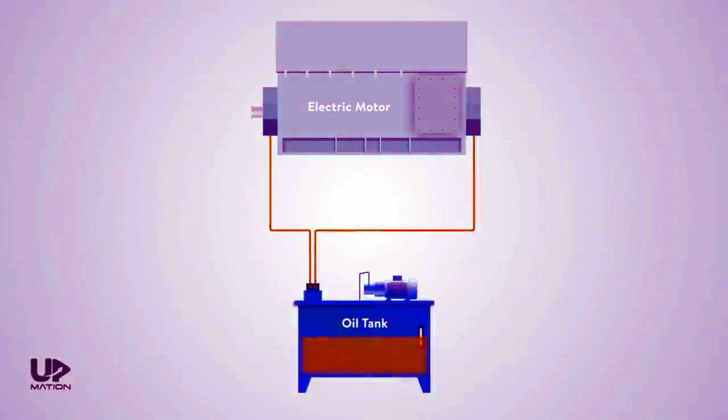If you have ever seen a pneumatic or hydraulic system in industry, you may have encountered these types of equipment with these kinds of symbols on them. These are a kind of control valve.

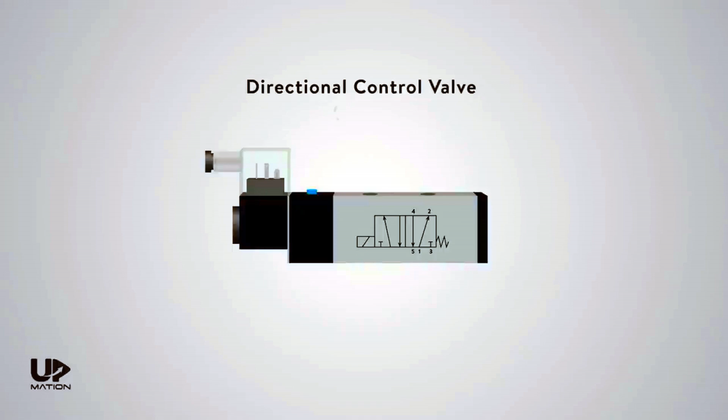The control valves are mostly known by their adjustability and throttling capabilities. But the valves we are going to talk about are the types that control the direction of the fluid flowing inside the pipe.

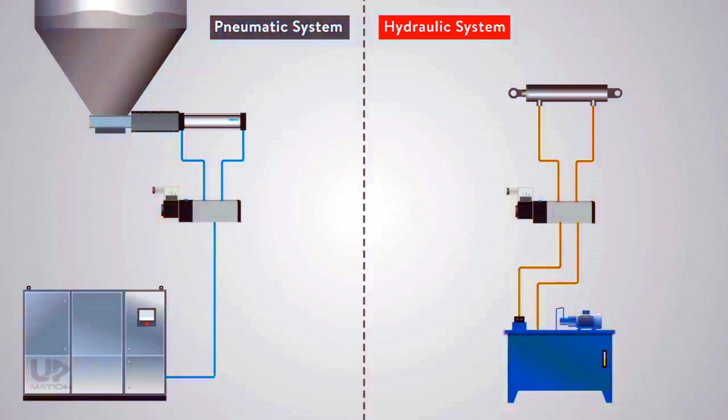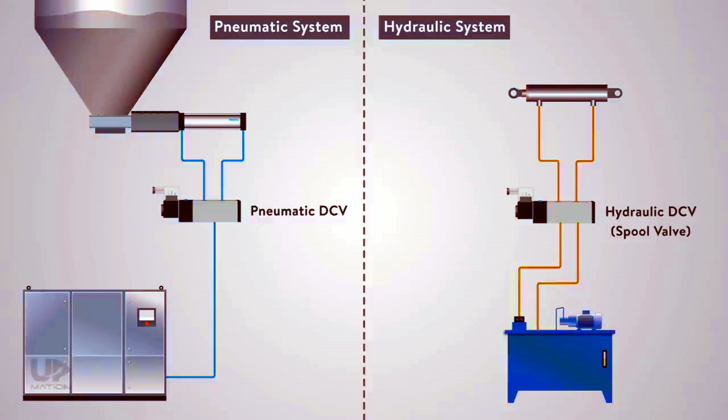Directional control valves are used in pneumatic and hydraulic flow control systems. So there are pneumatic directional control valves and hydraulic directional control valves. Sometimes the hydraulic directional control valves are called spool valves. As we're talking about the basics of DCVs in this video, and there's not much difference in their working principle and symbols, we develop our example based on a pneumatic system. And of course, if you learn one of them, you can easily learn the other.

Let's start with this simple pneumatic circuitry and then see which parts a directional control valve has. The main power of this pneumatic system is coming from the compressed air supplied by a compressor. The directional control valve is directing the flow of the compressed air in two different directions to open and close this slide gate valve using its actuator, which is a double-acting cylinder.

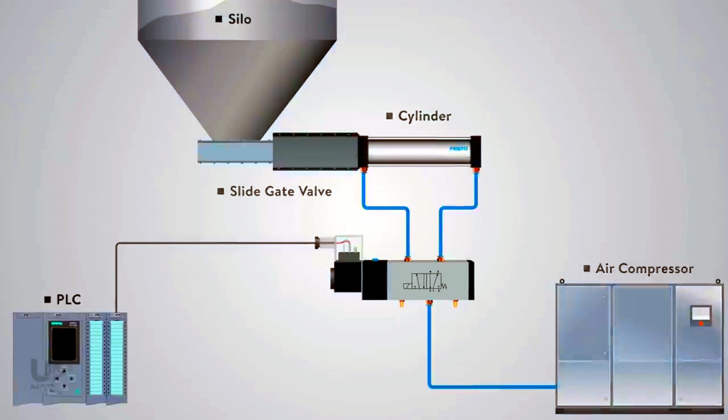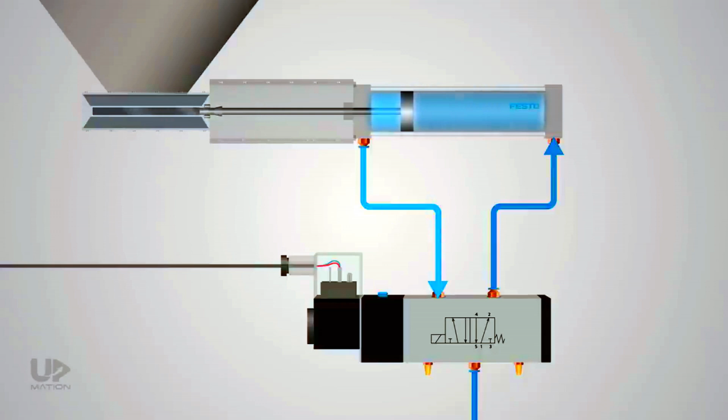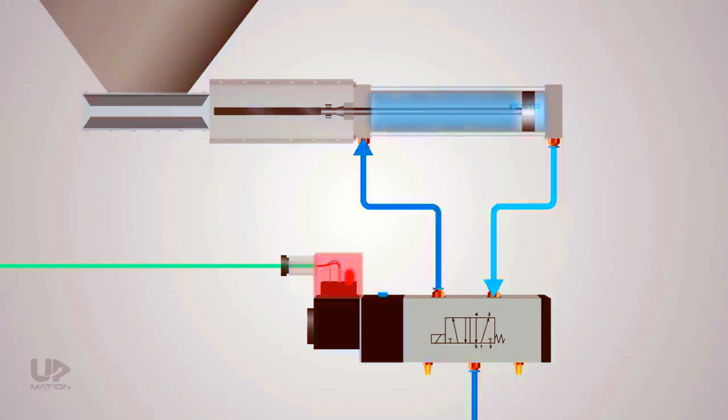A double-acting cylinder has an air chamber on each side of it to move the piston back and forth. One direction extends the cylinder and closes the slide gate valve to block the material coming out of the silo, and the other direction retracts the cylinder to its first position. Therefore, the slide gate valve is a normally closed valve. Meanwhile, the sound you hear is the air inside the cylinder exhausting from the valve into the atmosphere.

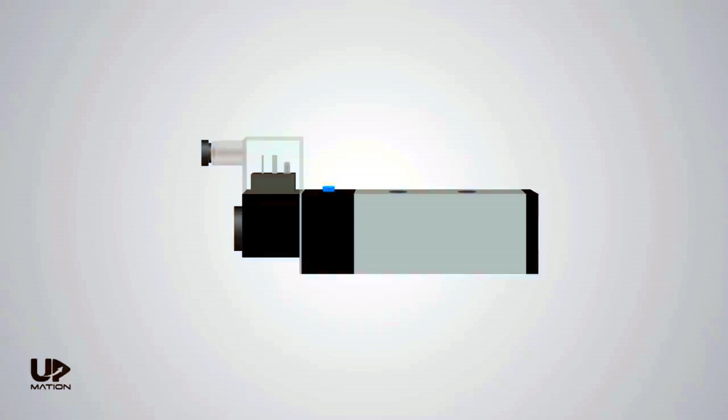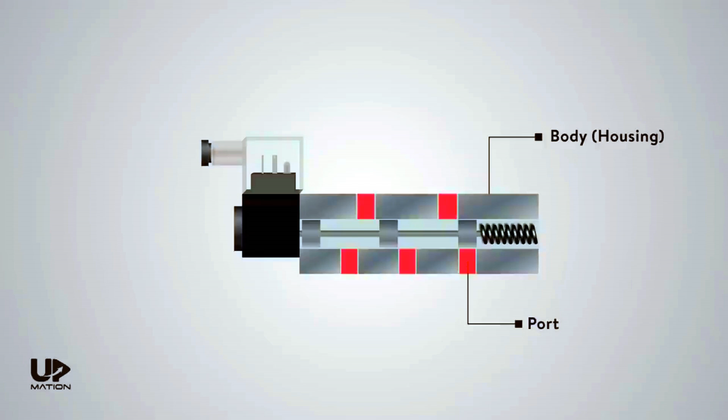Now let's take a look at the components and simplified mechanism of this directional control valve. This is the body or housing of the control valve, inside of which there are paths that air flows through. The holes you see here are called ports. Within the housing, there is a moving part that leads the air toward different ports of the valve and blocks the others. This moving part is commonly referred to as a spool.

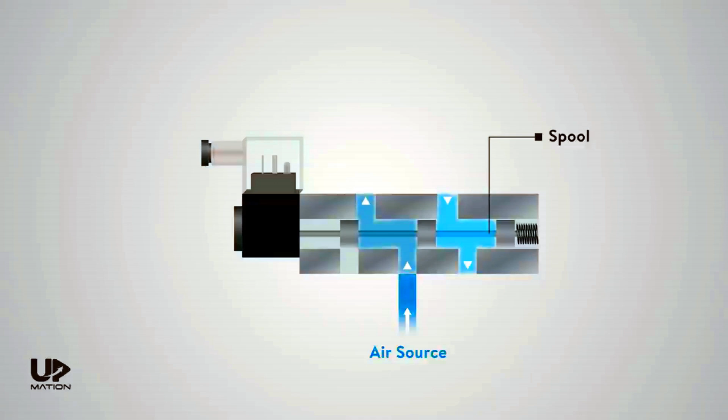The component that causes the spool to move within the housing is an electric solenoid. This is the neutral or rest position of the spool. As you may be familiar with solenoids, when it gets energized by a command from the PLC card, the coil will push the spool, and thus it will squeeze the spring on the other side.

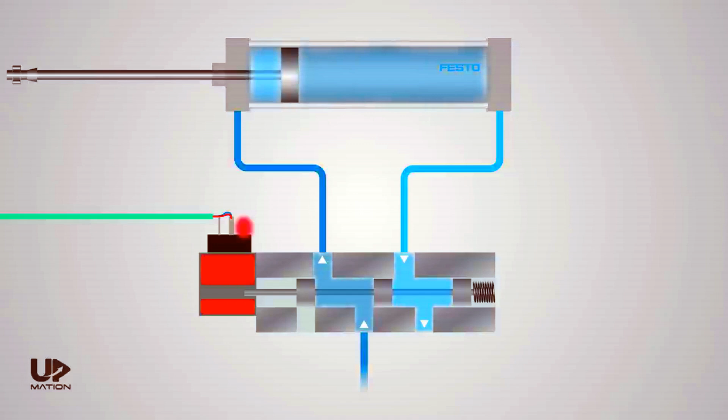As a result, you see the piston of the cylinder move to the right side. As long as the PLC's command remains on the solenoid, the position of the spool will remain still, and the compressed air will cause the piston to keep its last position.

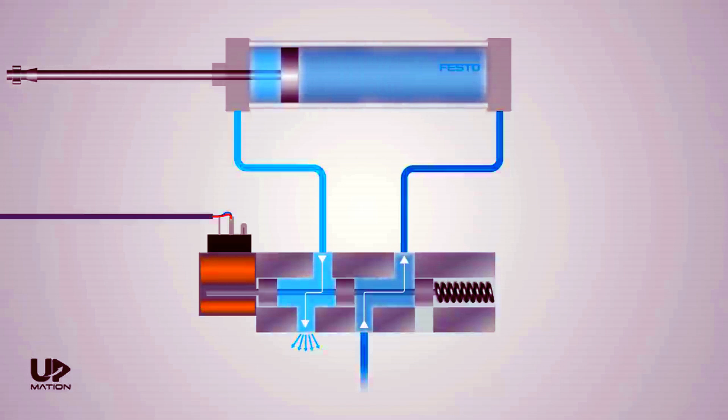As soon as the PLC removes the command, the spring will return the spool to its first position, and the air path will be changed. Therefore, the air behind the piston will be purged into the atmosphere via the valve exhaust port. Now it's time to learn how these valves are called and how to read their graphic symbols.

This valve is known as a 5/2 solenoid valve, or a 5/2 pneumatic directional control valve. The first digit is for the number of ports the valve has, and the second digit is for the number of states the spool can be in.

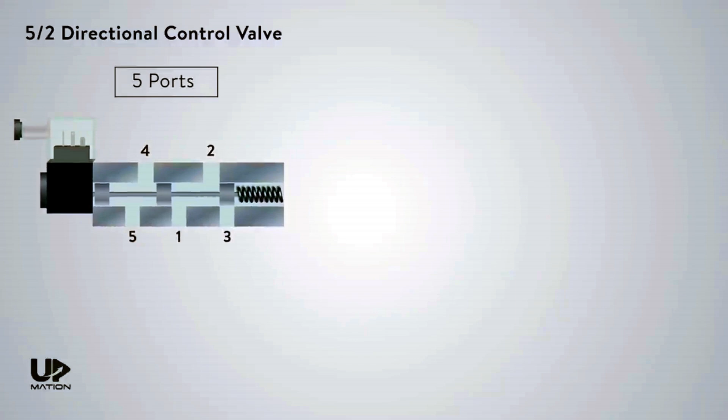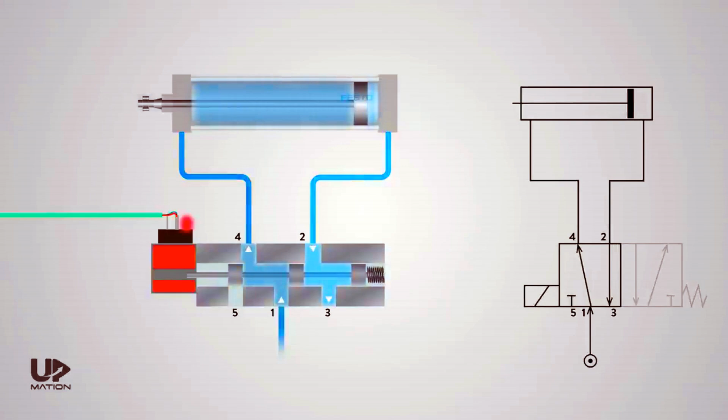As I've mentioned, this valve has 5 ports, and this is the ISO designation of the ports, which is a common practice. But sometimes you may see an alternative designation of the ports in DCVs by alphabets, in which P is for power or pressure that comes from the air source. EA and EB are for the exhaust ports, and A and B are the output ports to or from the actuator.

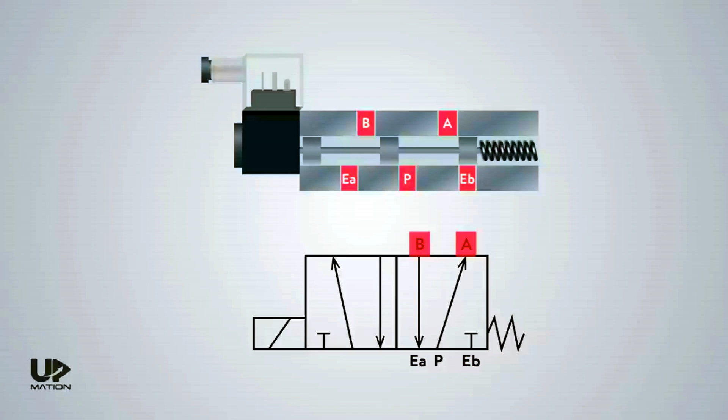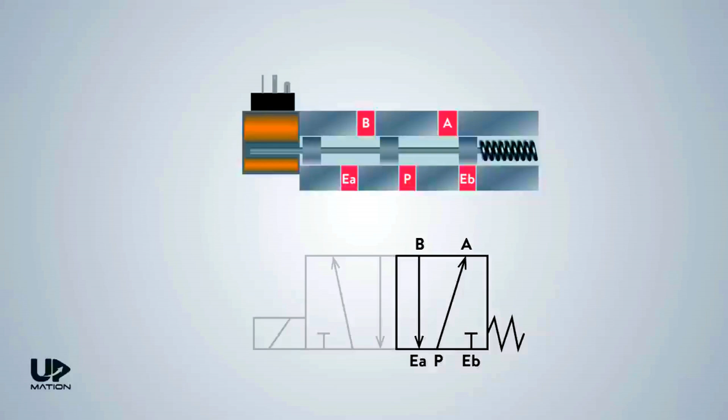This is the sign for the electric solenoid, and this one is for the spring return. In our circuit, when the valve is in its rest position, this square is active. When the solenoid gets energized and the spool changes position, the other one is active. Generally, the square just beside the solenoid sign is active when the solenoid is energized, and this is a rule of thumb for any directional control valve schematic.

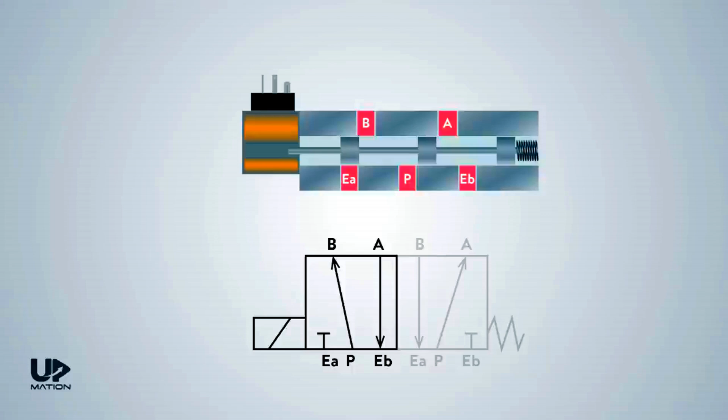In the end, keep in mind that there are a variety of other directional control valves with more complex functions in different applications, that we can check out in future videos if you like this one.